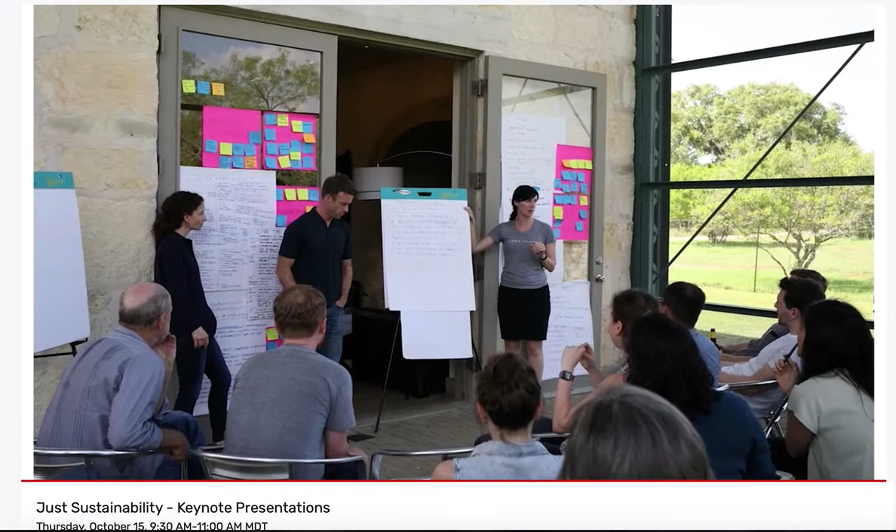In addition to the design principles that David described that drive our design process, we also think of social justice, equity, diversity, and inclusion as being an important part of environmental sustainability. Our firm has pursued the JUST label, which we think of as being a very important first step at being more transparent about our social justice at our firm.

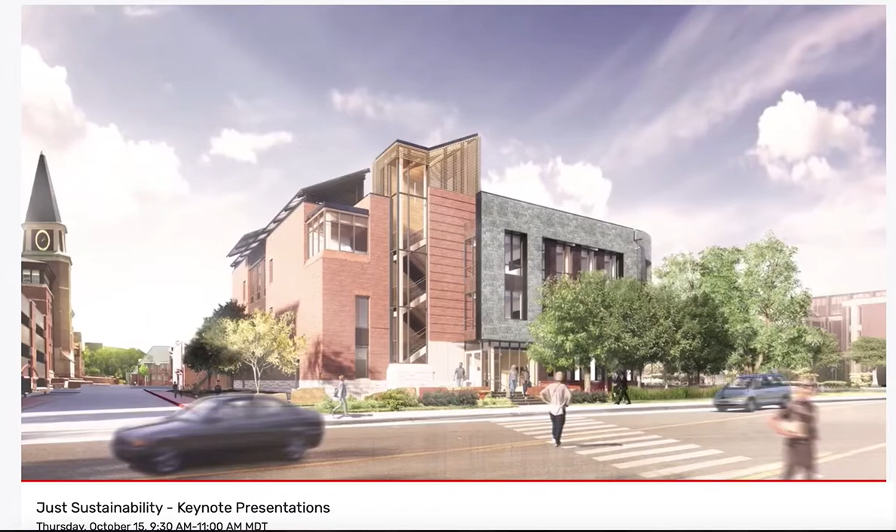We're going to talk about two projects today, the Austin Central Library and the Confluence Park. We're currently also working in Colorado, and at the very end, the dessert will be a fast track construction video of the DU project.

Over 35 years ago, Lake Flato began, and Ted Flato and I are always inspired by buildings that exhibited their particular place, fitting of their context, built from the land. In the case of these images, these are our lovely barns and silos that exhibit that great American word, ingenuity, making the most with the least.

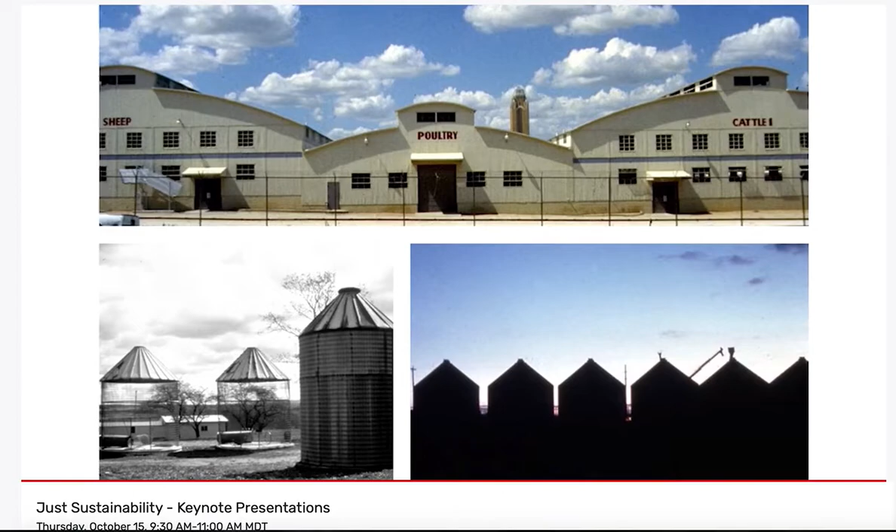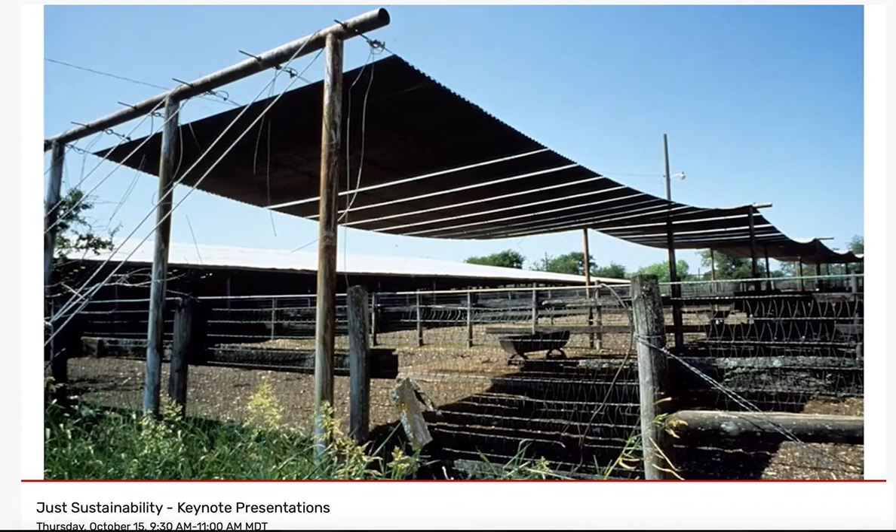I especially like these cow shades, and they led us to a journey of creating architecture, in the case of the Carraro house, of recycling an old cement plant into a home in the landscape that has a large screen porch and is very much connected to the environment.

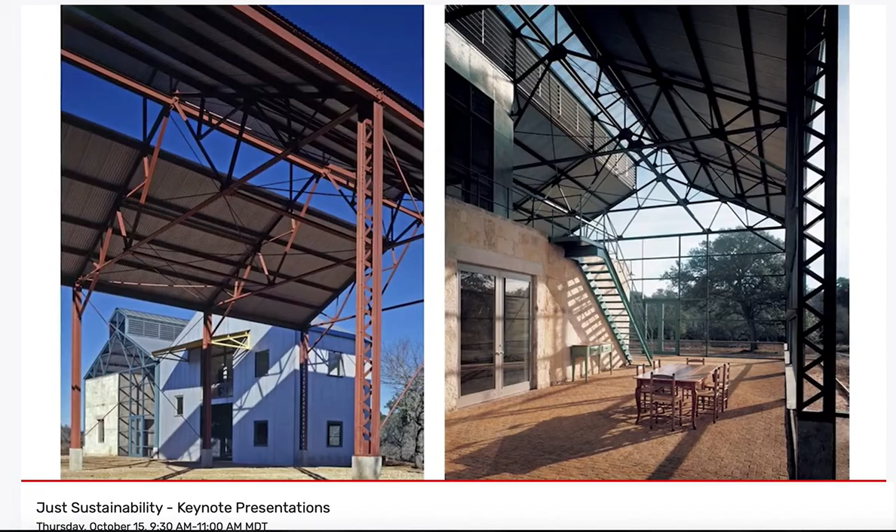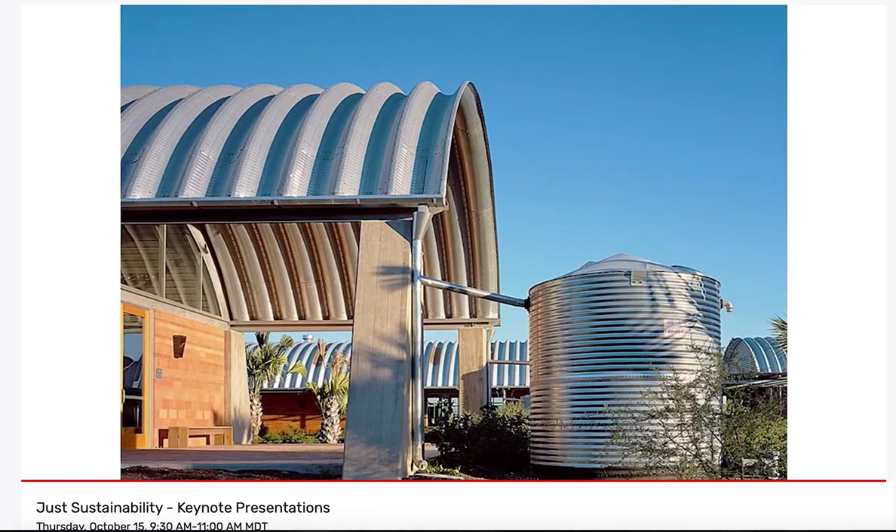The screen porch is actually the best room and the largest room of that house, which then led us to other forays into the wild, such as the World Birding Center near the Rio Grande Valley, which recalls the silos of Texas with corrugated metal roofing that is both sheltering and prefabricated, and even recalls barns. Our mentor, O'Neil Ford, said that he never met a barn that he didn't like, and that's certainly true with us as well.

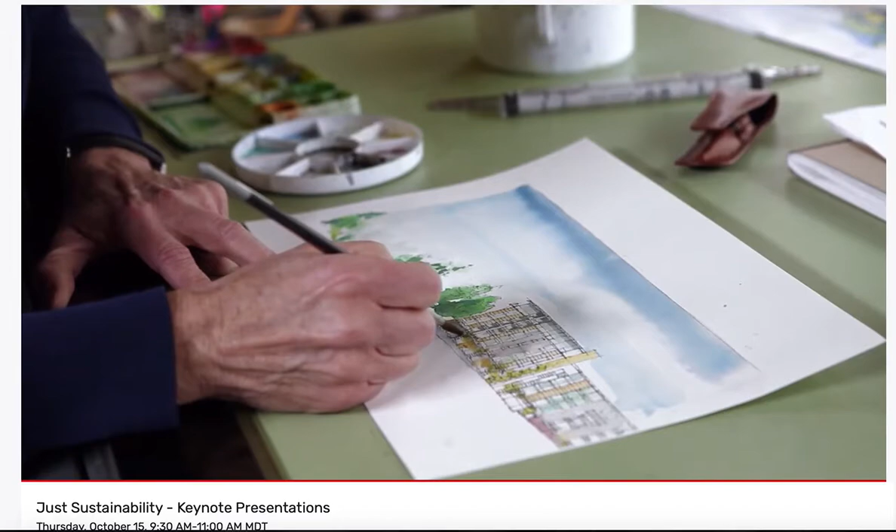We are really excited about what we do and how we do it. We have an office of 120, an office in Austin, an office in San Antonio.

Every year we go out to West Texas, to the West Fork of the Upper Nueces, on a retreat. It's called Flake Lato because we used to get mail addressed to Flake Lato, and it became such a joke that we call that our retreat. We enjoy building together itinerant shade structures that will protect us from the sun, and we grill and joke and swim and enjoy one another. Building buildings, crafting buildings, designing buildings is such a rigorous journey that it's so important for us all to enjoy one another and our clients and the occupants of our buildings, and to watch the buildings emerge.

So I grew up in Austin. It was really important for the library that it be really exuberant and capture the spirit of Austin, keep Austin weird. What that really means is being outdoors and enjoying the outdoors.

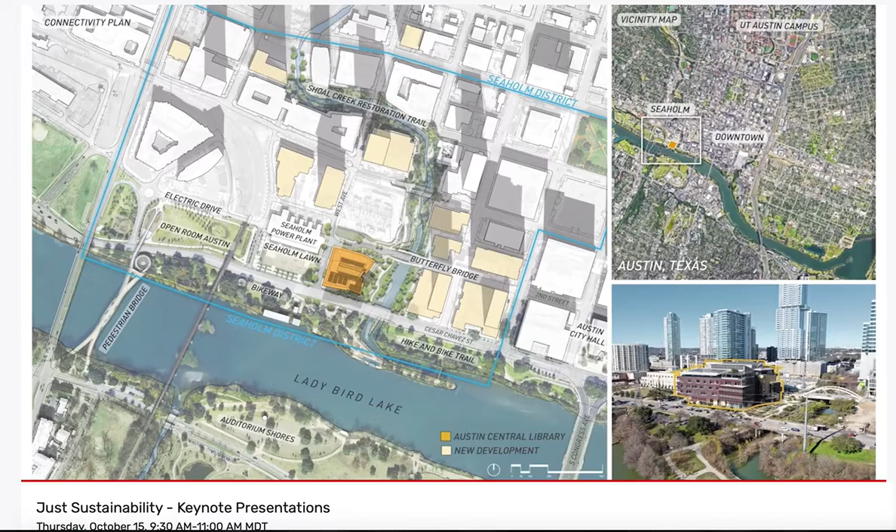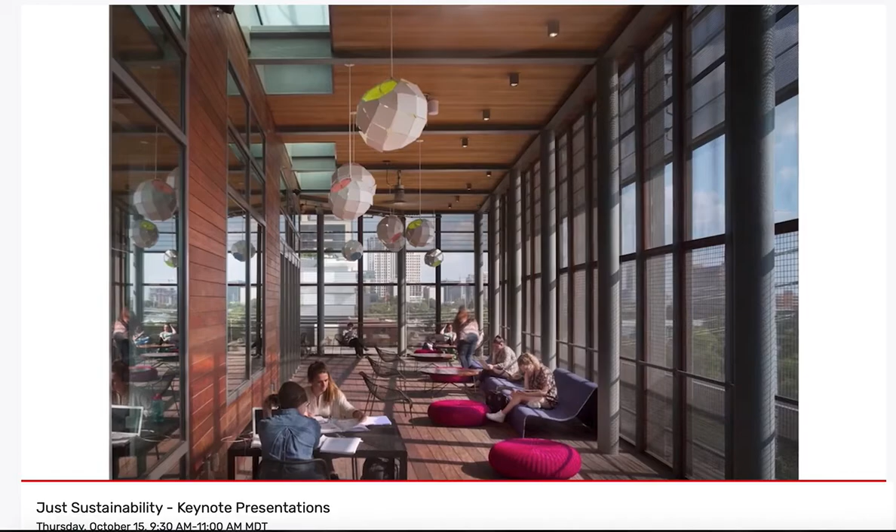Citizens in Austin never had a destination where they could go to see the river and Lady Bird Lake and the confluence of streams and creeks into the Colorado River. So finally, the library was an opportunity to create screen porches, and in this case, a rooftop garden that doubles as an event space, a butterfly garden.

The Austin Central Library Integrated Design Workshop was a really important milestone in our design process. We brought together a group of not just the design and construction team, but all project stakeholders, including the owner, the users, and neighborhood residents, to come together and really set a vision for what we wanted the Austin Central Library to be. Sustainability was a very big part of that vision.

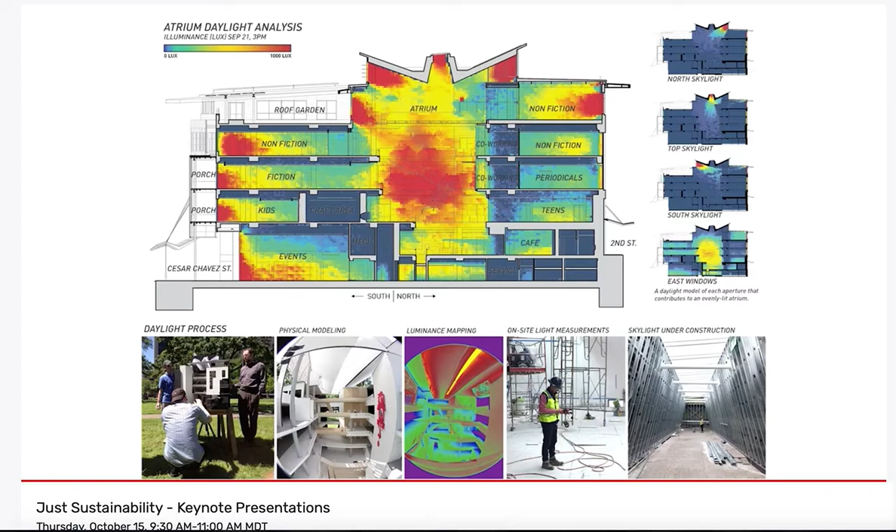We set a very ambitious goal for the library to be the best daylit library in North America. We also felt that as a civic project, it was our responsibility for the building to serve as a model of stewardship and conservation for what responsible water use looks like. The library is shaped by light.

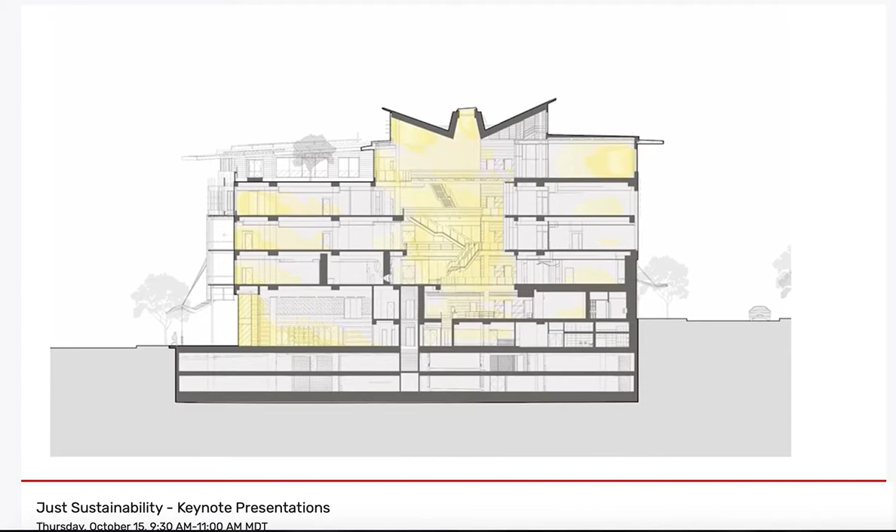We wanted the library to be the best daylit library in the United States. In order to achieve that, we had to think about how light comes into the building, is reflected, and dispersed throughout. This section shows how the lantern becomes both a reflector and a means of beaming light down 5 stories within the building.

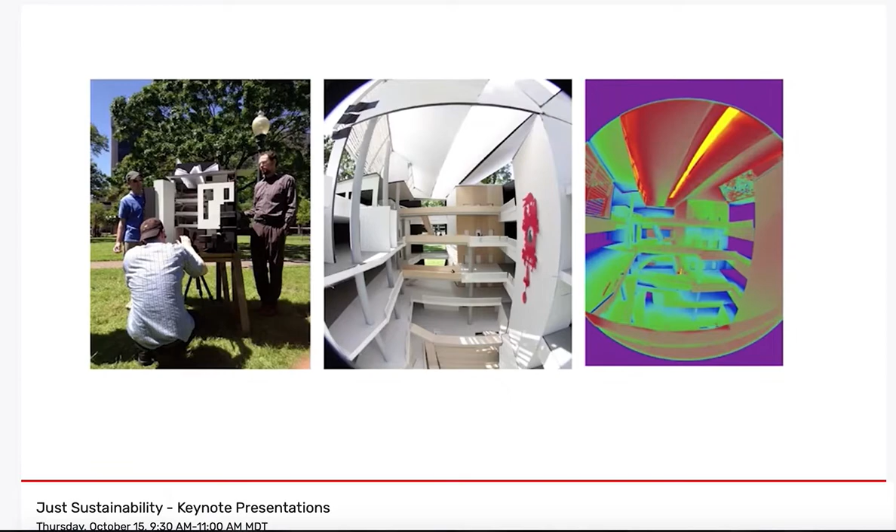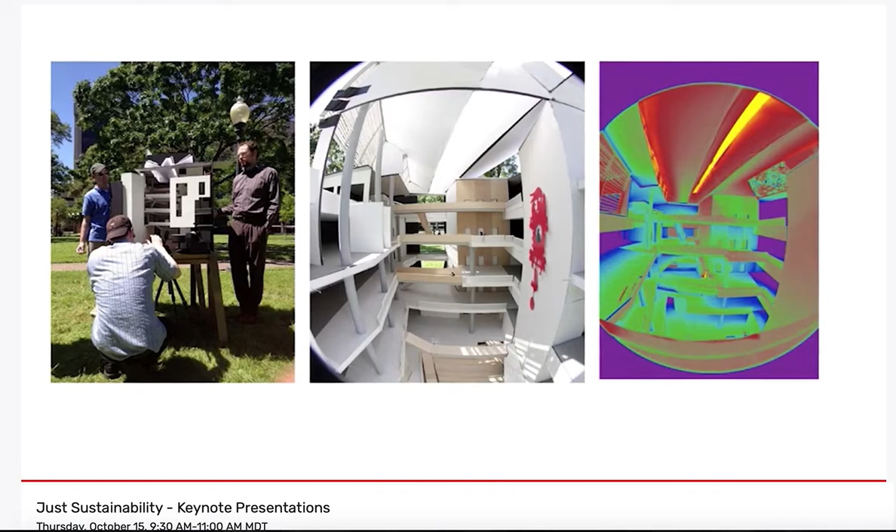We created daylighting models, out in the park, playing with a big quarter-inch scale model to adjust the best shape of the aperture of the roof and how that light beams into the space. We used computer modeling and luminance modeling and worked with Integrated Design Labs in Seattle to tweak our sections.

This is the image that shows the aperture, the 8-foot wide frosted skylight that is beaming light straight down 5 stories, and then the clerestory, which is bouncing light into the upper areas of the building, ensuring 80 to 85% of the building area is daylit.

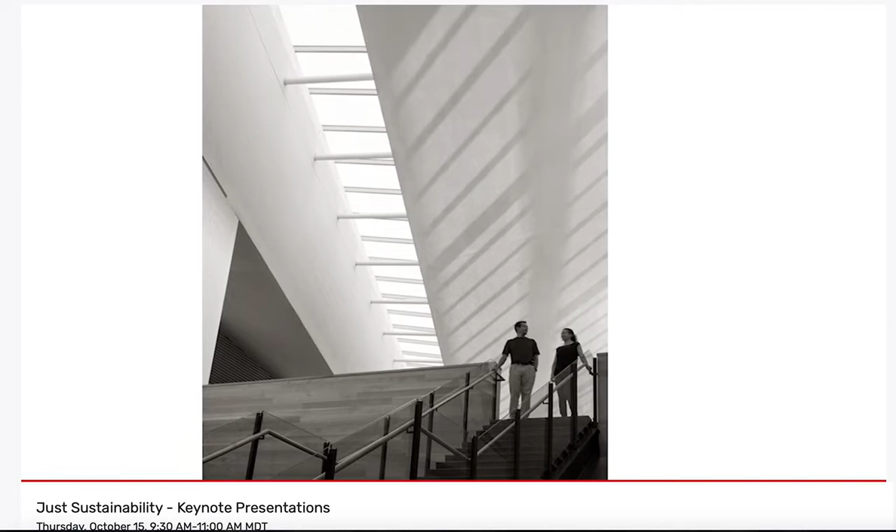A look up from the bridges to the skylight aperture shows the nature of how light is beaming, bouncing, reflecting, and refracting throughout a 5-story space. So it really does become Austin's living room.

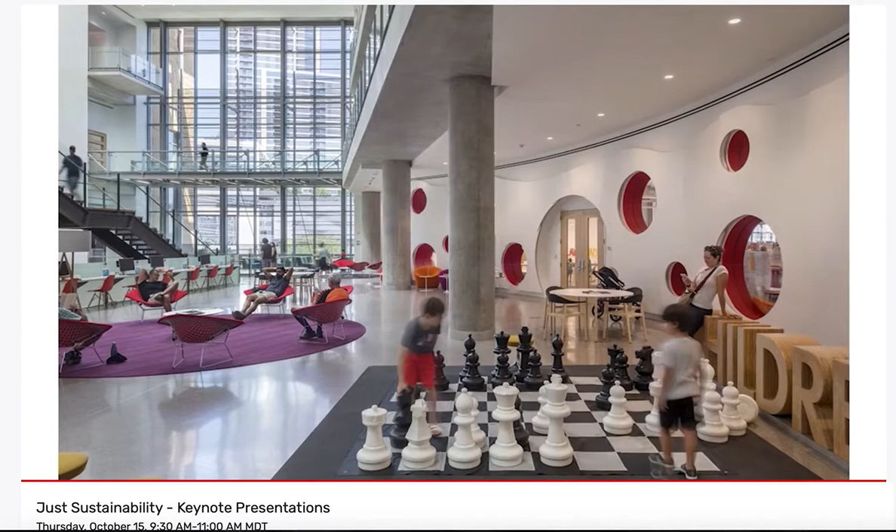For the library to become a library of the future, it was really important that every floor level felt like it had its own living room, its own purpose, its own connection to the outdoors. On level 3, kids can play chess, go into the children's area through round apertures and have reading moments, while teens can be on their own and away from the family, doing whatever in the world teens do in their own space.

Looking out to Shoal Creek to the west, certain parts of the building are very much a stone civic building—weathering, purposeful, permanent—a sense of a real civic presence, not just a repository for books, but the passing and sharing of knowledge.

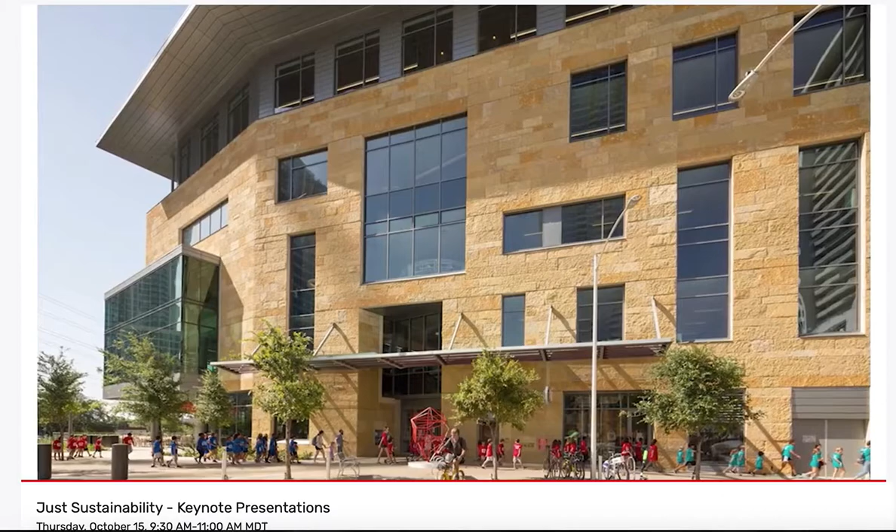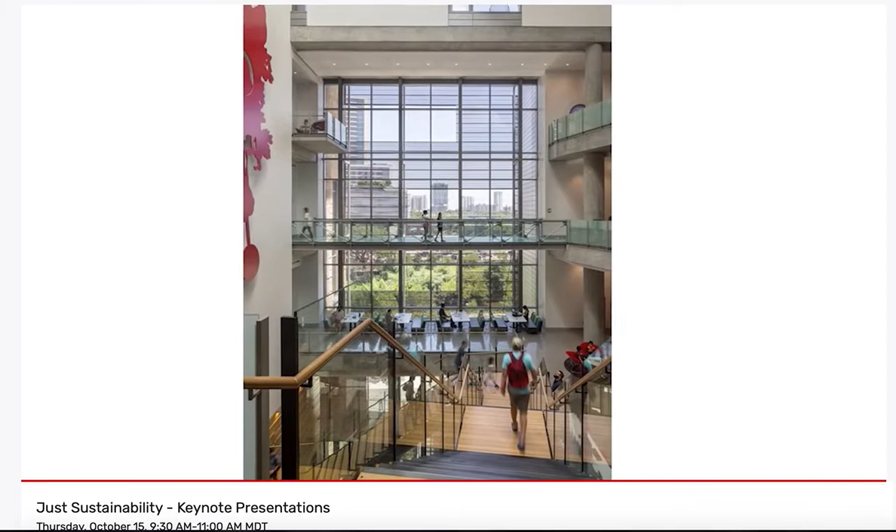Within the building, there are always means of looking out through large openings to Shoal Creek and Lady Bird Lake, with glass bridges, wooden bridges, a real array of means of moving through the great 5-story living room space.

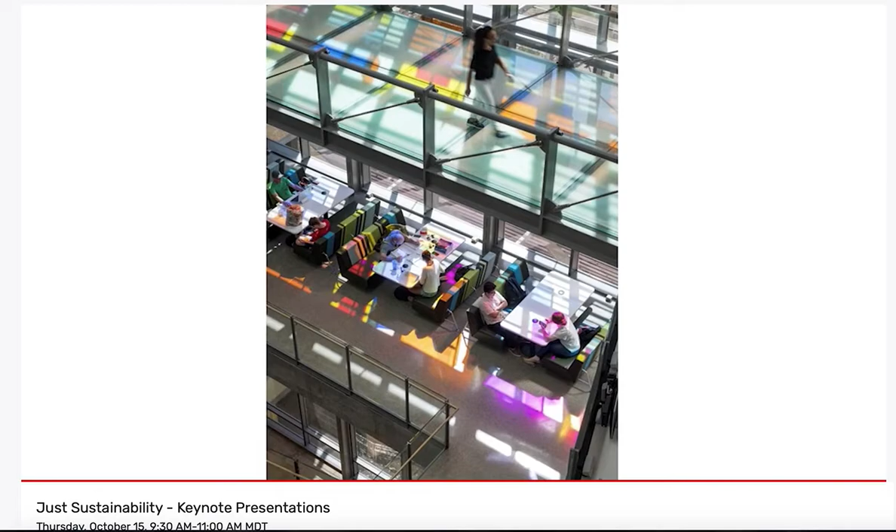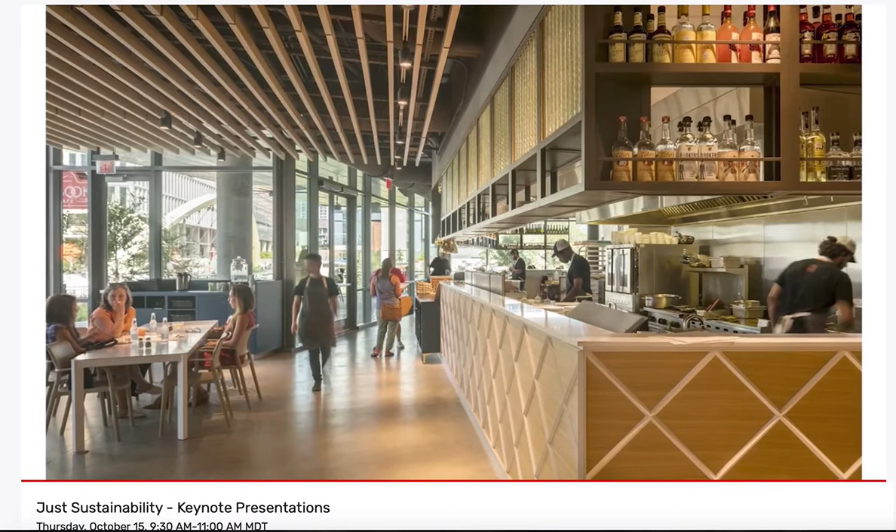At the street level, there is a store, a restaurant, a great event space. We purposefully put program at the street level that would animate the streetscape and make the city and cityscape better and more active. The event space holds 650.

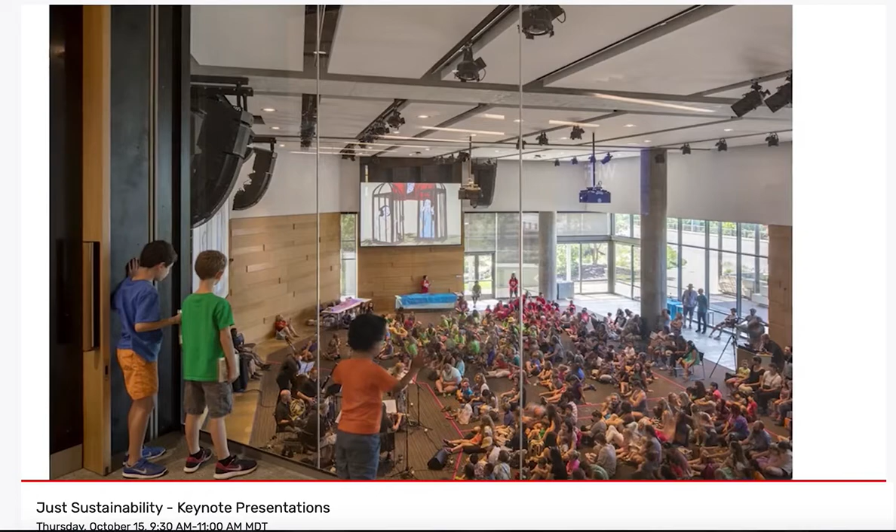They have many events, whether it's for AIA awards or all kinds of nonprofit groups, always coming and going. There's this ebbing and flowing of people using the library, not only to share knowledge and meet and make community, but also even to do startups in some of the shared conferencing spaces throughout the library.

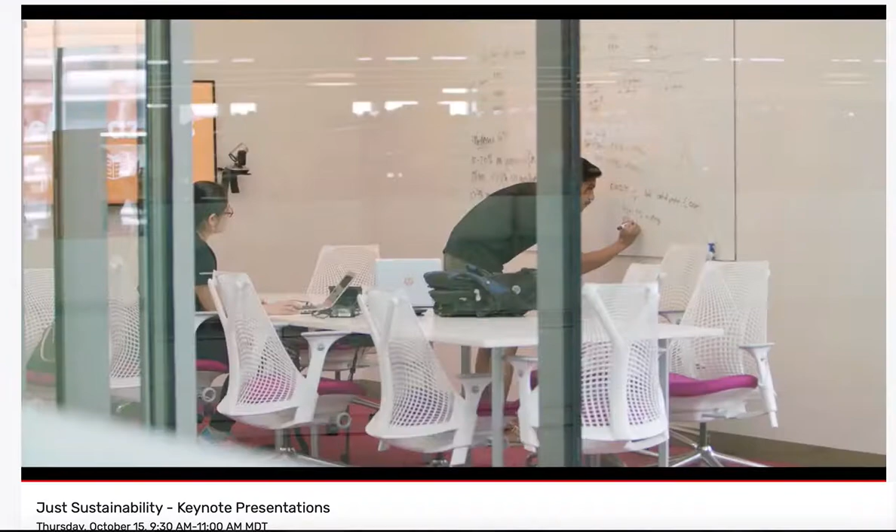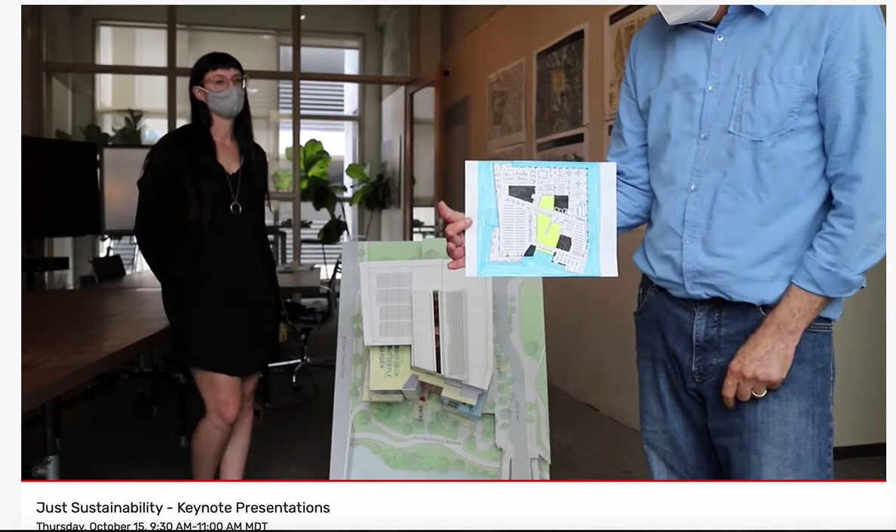As we evolve, the yellow indicates the east-west core of the atrium, beaming light in. This is the internally lit zone, and the perimeter lit zone. That's how we got to 85% daylight.

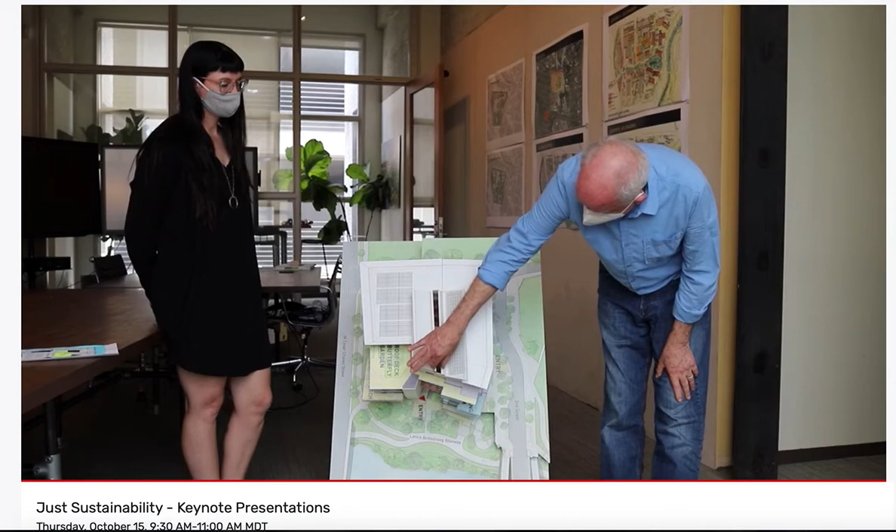So we made many models. This is one, and this is a view from Shoal Creek, running east-west. This is the top-lit skylight—it beams a white skylight down 5 stories into the building.

From the south, where Heather is, light comes and bounces off this roof, off this ceiling, and down in, bouncing back into levels 5 and 6. From the north, this clerestory brings light and beams it in on the south end of the east-west bar.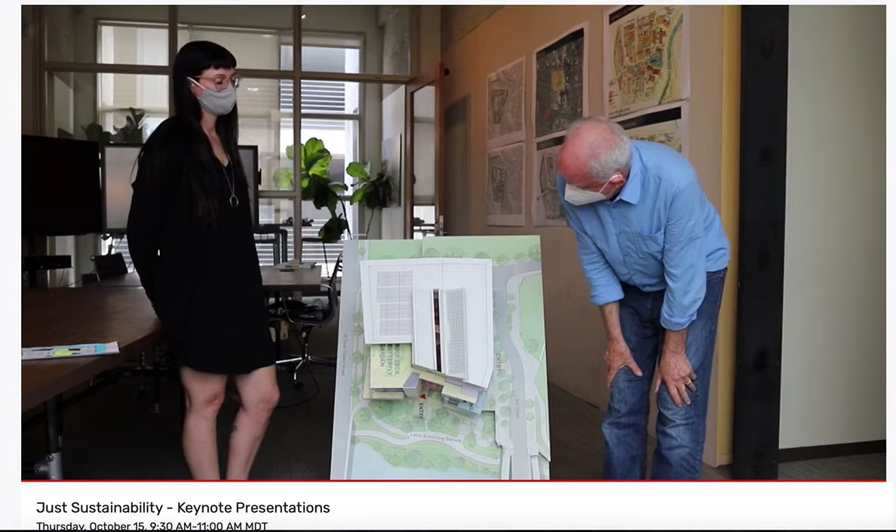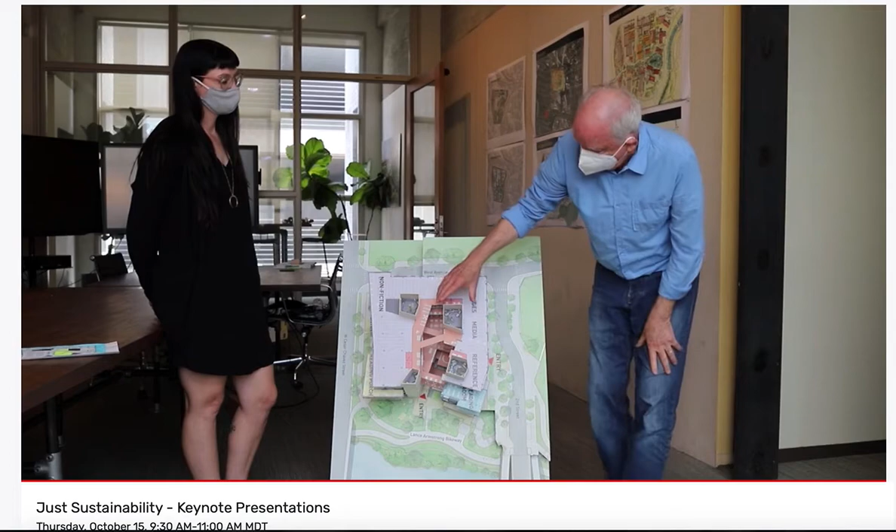So as we built lots of models, this one shows how the core—those 4 big opaque pylons, elevators, stairs, restroom, mechanical—are in these 4 quadrants, allowing the atrium to run east-west with views out to the east and downtown. The western view is less desirable, hot. South views to the lake offer really great daylighting, north daylighting.

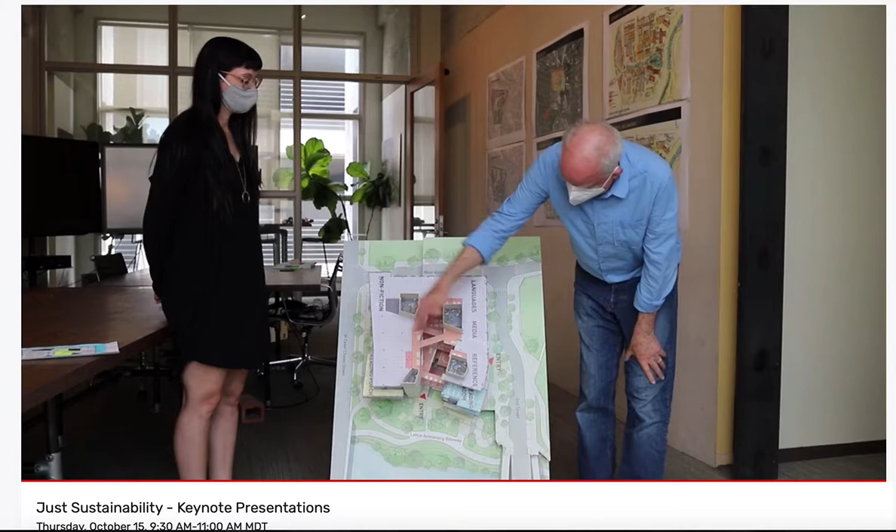This was a really nice way of thinking about and showing the library how this atrium was different as you moved up floor to floor. This bottom level, and level 2 effectively, is the great arrival, where you come as a family and kids go to the kids area and teens split off. And you move up and there's a reading room that's double height. So all variety of spaces throughout the building.

From every approach, this building looks completely different because it is tuned to its unique daylighting and sun angle needs. As David said, the west facade's views aren't quite as desirable there and the heat gain is very serious, so we tuned our shading strategy accordingly.

We've got a much denser shading there so that we can make sure we're blocking the glare that can provide visual discomfort, and that we're knocking down the heat gain, which would have increased our energy needs.

So wasn't this 26% glazed by area? Correct. And the north was 38, 39%, south was about 35%, and the east was similarly around 34, 35%.

So every facade is tuned to peripheral daylighting. We're maximizing daylight, minimizing heat gain on the exterior skin, and beaming light down through this atrium to provide fill-in light in the internal core, while at the same time giving them a 100-year building.

These are all flat floors, so they can program these floors as they want. The only things that can't move are the opaque cores—every other space, every wall is movable. So in terms of a 100-year building, it's eminently flexible.

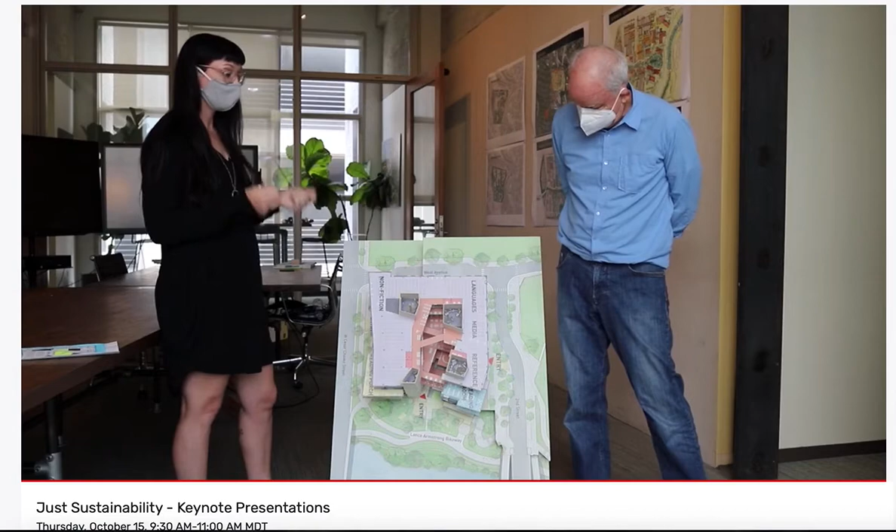You'll notice even the placement of the staircases and walkways throughout the project were carefully placed so we could make sure we weren't creating any dark spots throughout the library. So we used a variety of tools—a physical model was one of them. We were also using computer simulation tools, constantly testing the impacts of different design decisions and making sure we were providing really great daylit spaces.

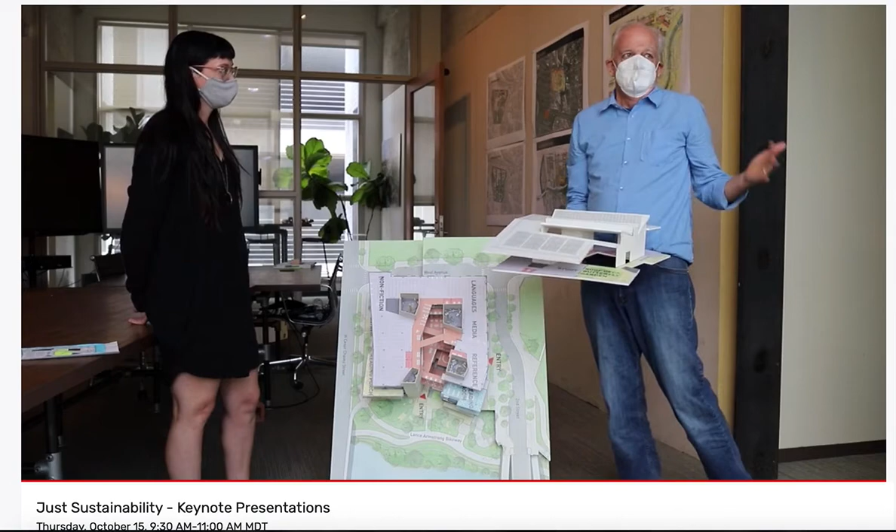Here's this crazy cool section of a butterfly roof facing south, north, along this long axis, and the openness as you move through the building. The shaping of this and the shaping of every floor plate was all modeled physically, as well as by computer. And we challenged the daylighting consultant many times, and he challenged us back. So it was a wonderful collaboration.

We also included a large PV array on the Austin Central Library. It's a 180 kilowatt photovoltaic array that tops a pollinator garden. It's one of my favorite spaces at the library because it's just a really great habitable space, very comfortable throughout the year, a great outdoor space with ample daylighting and a really thermally comfortable environment.

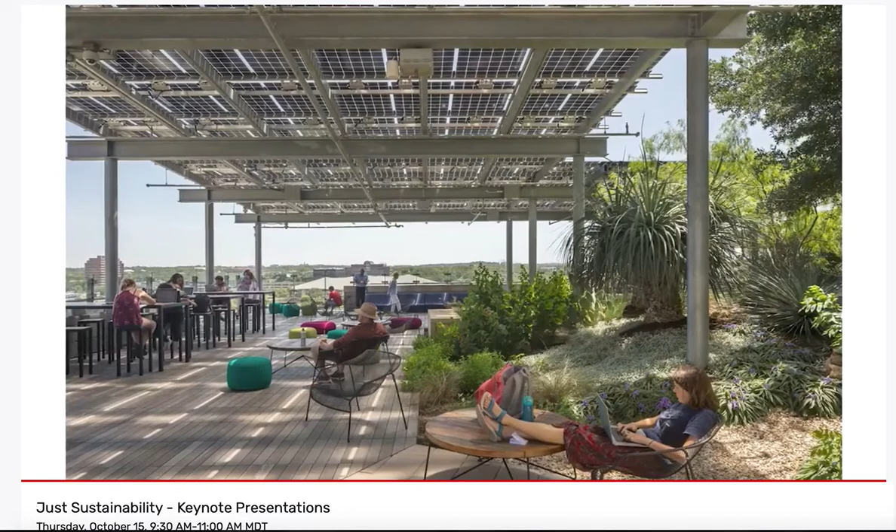That large array is actually on the downtown network, and we had to partner with the central utility to come up with an interconnection agreement, because before the library, you could not connect to the downtown grid. So this was a really important pilot project on how we can allow larger PV arrays to be interconnected on the downtown network in Central Austin.

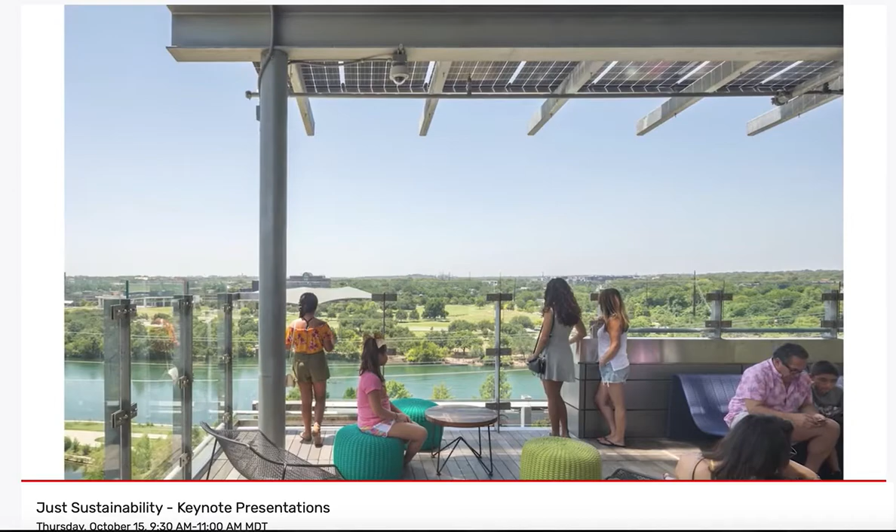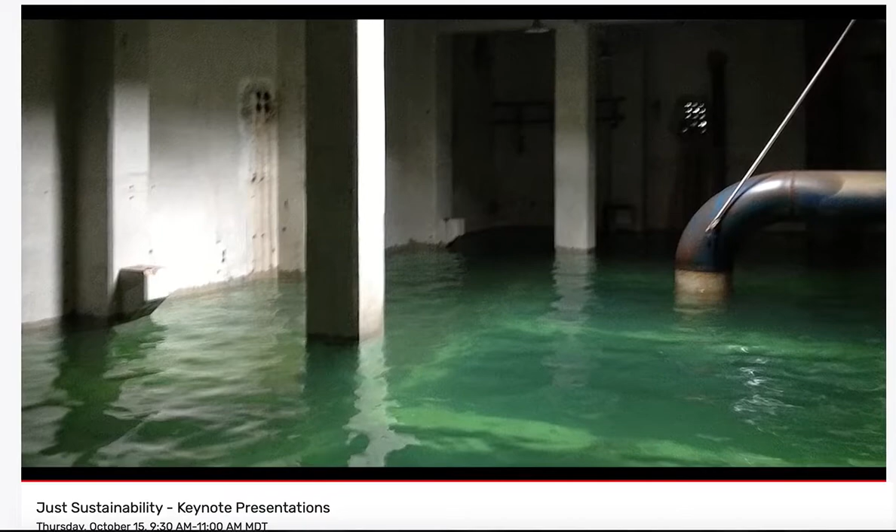After setting our water goal for the library, we stumbled upon a really unique opportunity to realize it. During that same integrated design workshop, we were walking the library site and discovered an underground vault, 373,000 gallons of volume, where we are storing air conditioning condensate and rainwater to supply most of the non-potable water needs for the project.

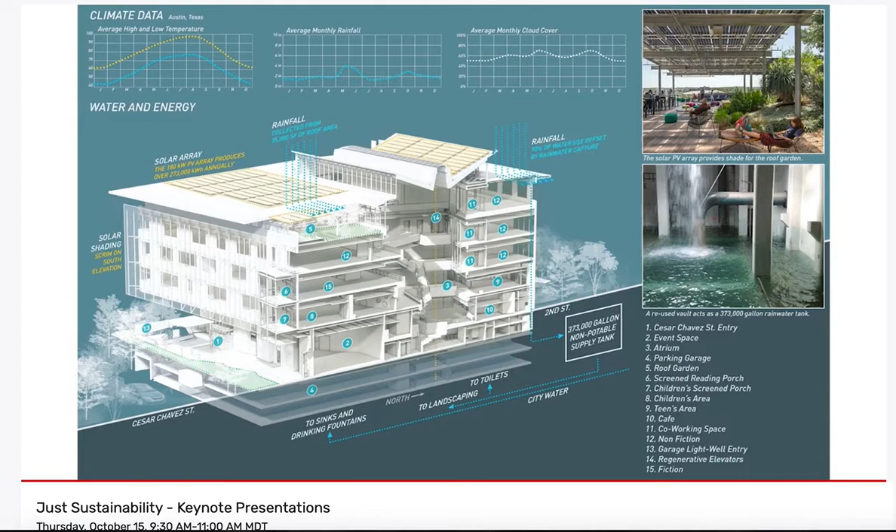The only potable water that we have in the project is for showering and drinking. Flushing toilets, irrigation, everything else is supplied by the water stored in that vault. So it's a pretty amazing opportunity for us to demonstrate water conservation in a region that is dealing with some pretty serious water shortage issues right now.

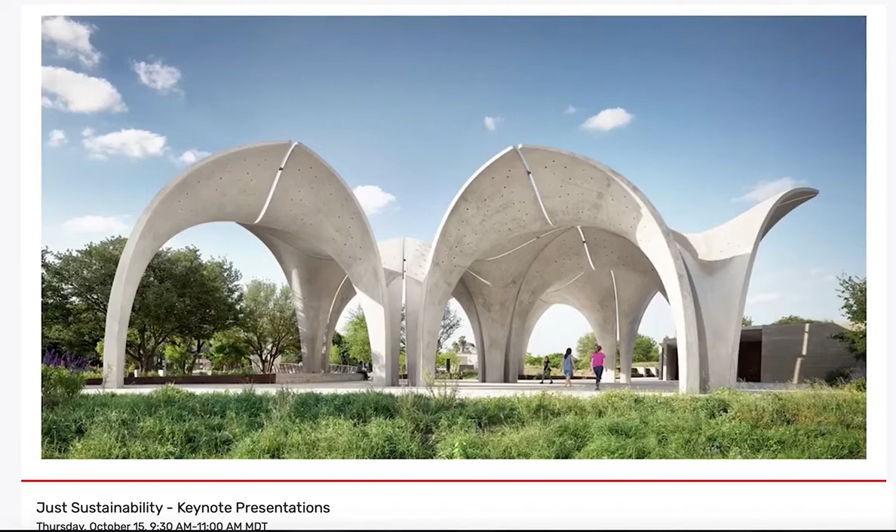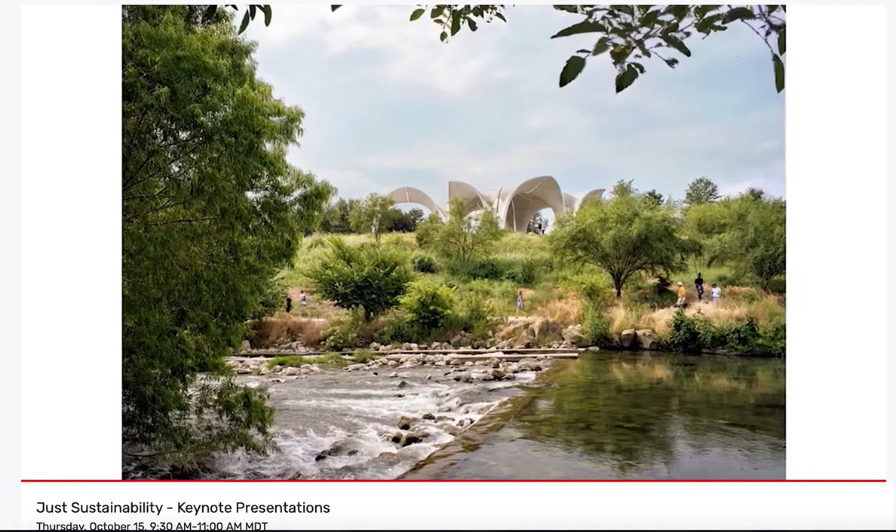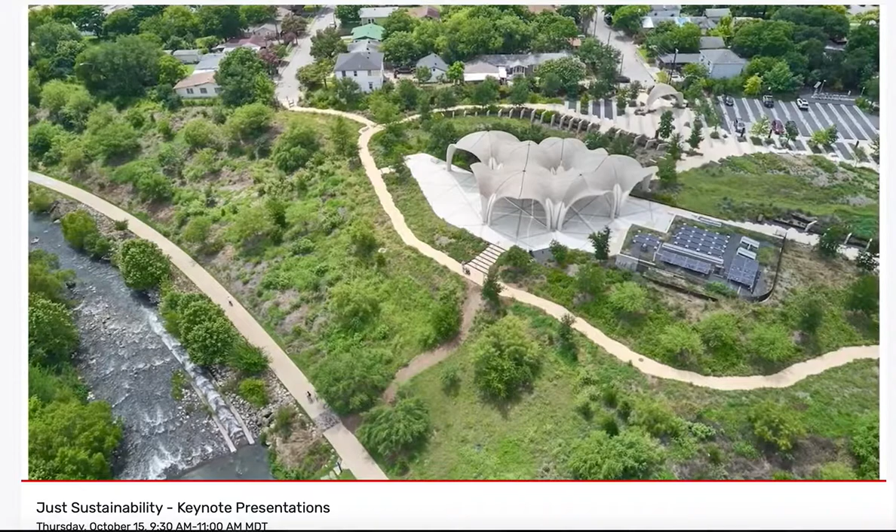Unlike the library, this is a shade structure we were asked to design to be at the confluence of the San Pedro Creek where it meets the San Antonio River, about 4 or 5 miles south of downtown, between the Alamo and the 4 downriver missions. Confluence Park was very much shaped by capturing and harvesting rainwater, and how best to funnel rainwater into a cistern, recalling how the aquifer in San Antonio and Central Texas gathers rainwater, stores it, and replenishes the ecology of Central Texas through the karst aquifer.

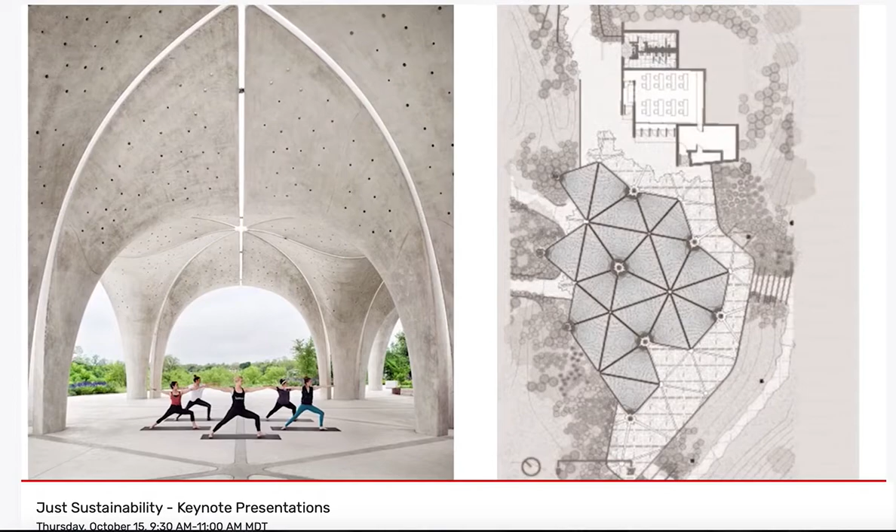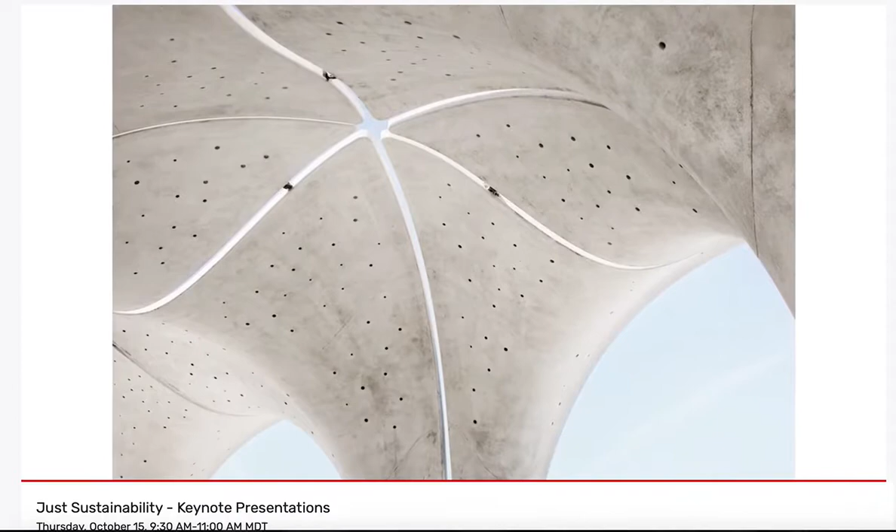It was a really fun and unique opportunity for us to collaborate with an artist and another architect, one and the same, and come up with an idea of how to craft memorable shade structures that exhibit not only how to shade one another, but also how to capture rainwater and strengthen the ecology at this confluence. We partnered with Andrew Kudless of Matsys to design the petals at Confluence Park.

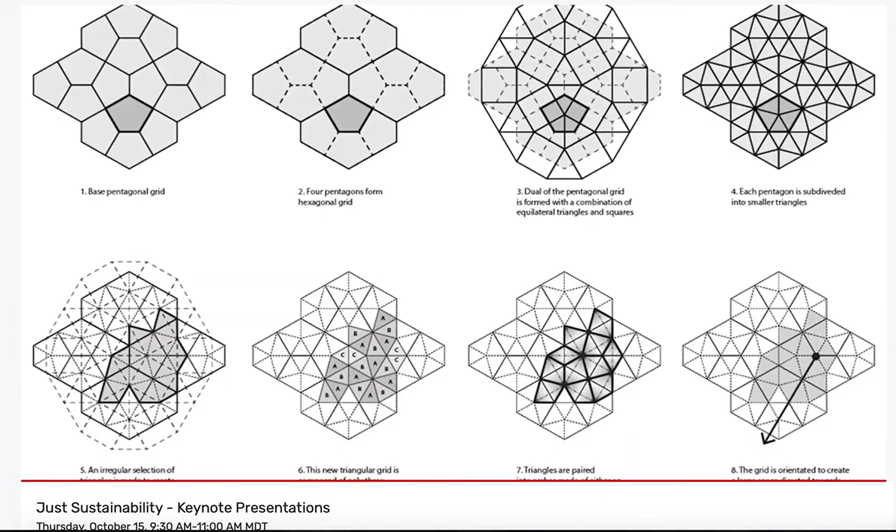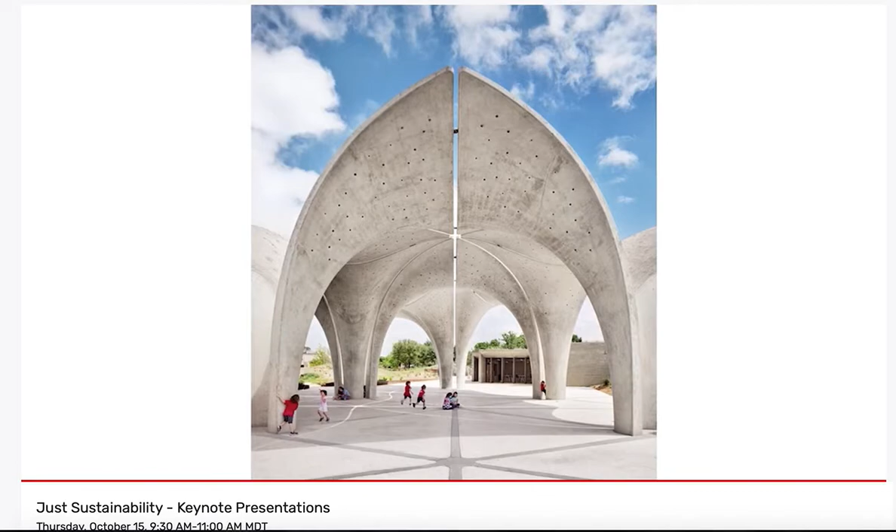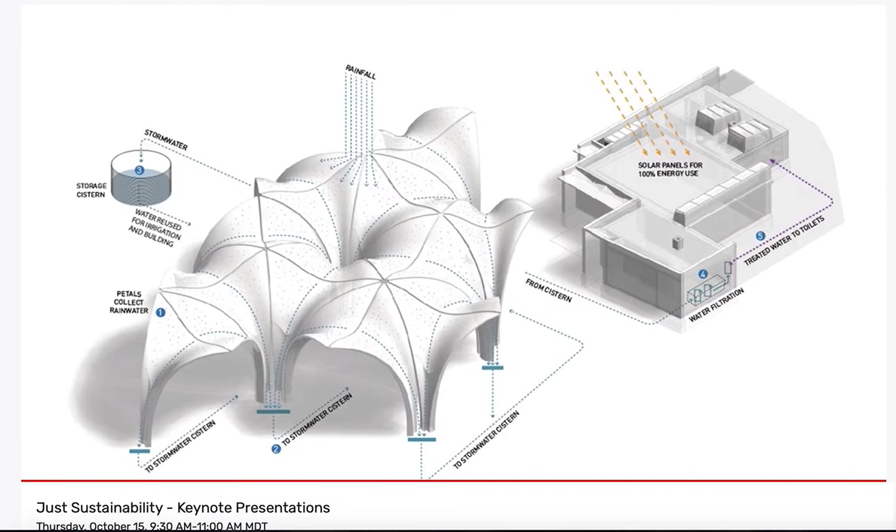These concrete petals actually take a cue from biomimicry, the design process of looking to nature to find design solutions that mimic natural conditions. We studied the natural hydrology of the existing site, how water moved through it pre-development, and how we could mimic that through the concrete petals. The petals serve as a means of collecting and storing water so it can slowly leave the site, be filtered and cleaned, so that once it enters the San Antonio River, it provides a high water quality source to San Antonians.

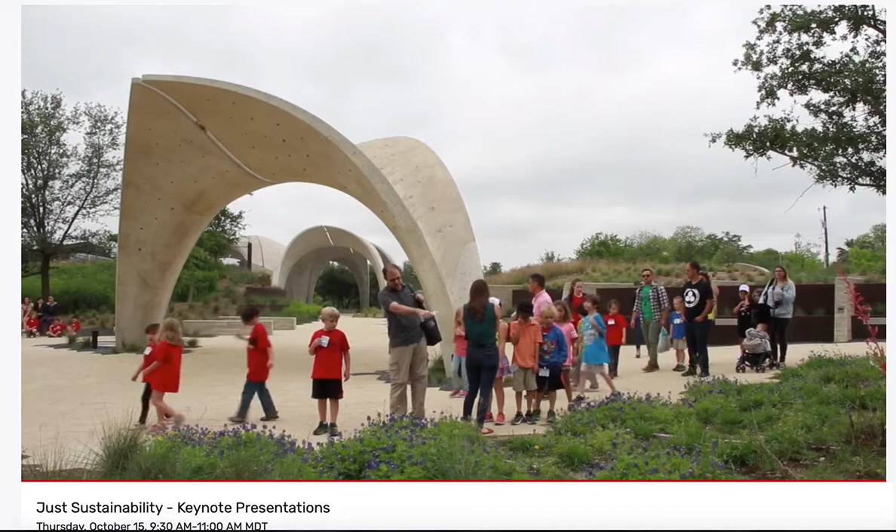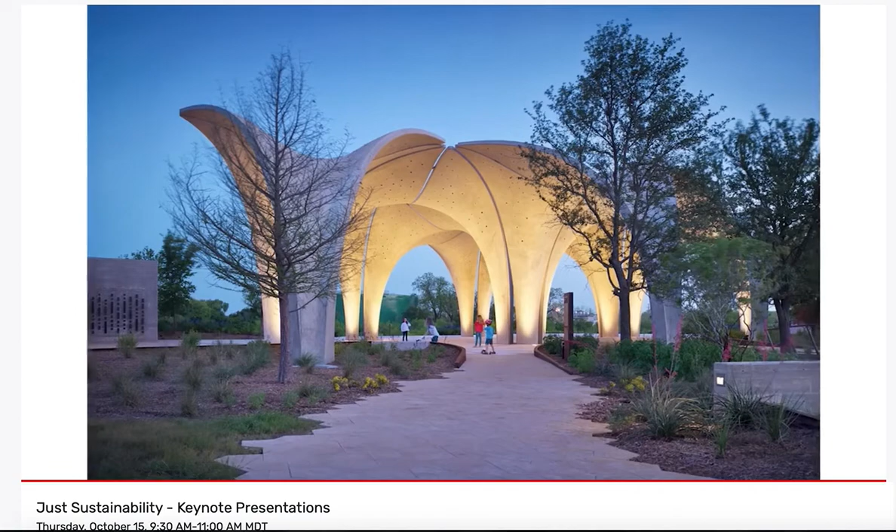One of the most important goals we set for the Confluence Park project was to make sure sustainability was demonstrable, and the petals are extroverted for that exact reason. We wanted the systems for collecting water, storing water, and producing renewable energy to all be expressed in the project. People actually come to Confluence Park whenever there's a rain event—it's a spectacle to watch water being filtered and collected on the concrete petals, really achieving that goal of making sure people understand the role of water conservation in our community.

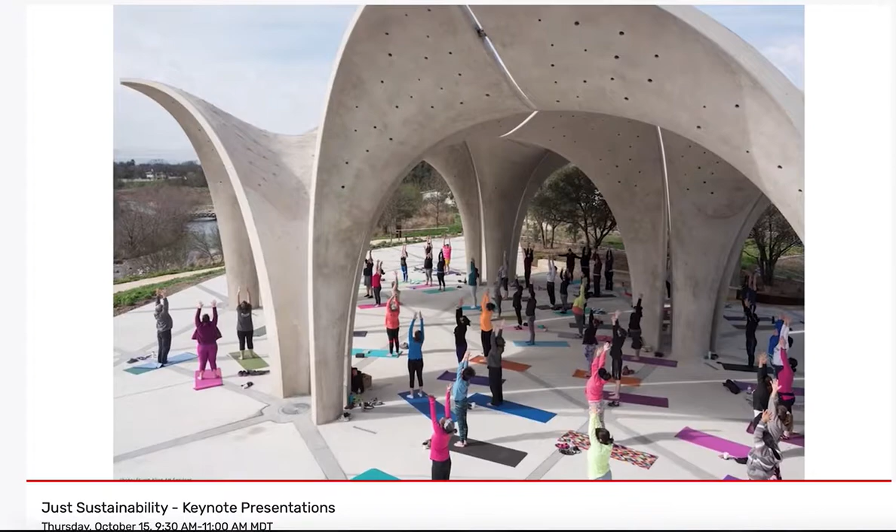Confluence Park is a very beloved amenity in its community. It's become not just a place where people come to learn about conservation in San Antonio, but it also hosts a variety of events—weddings, birthday parties. It's really become a shared space for people to make healthy living an integrated part of all aspects of their lives.

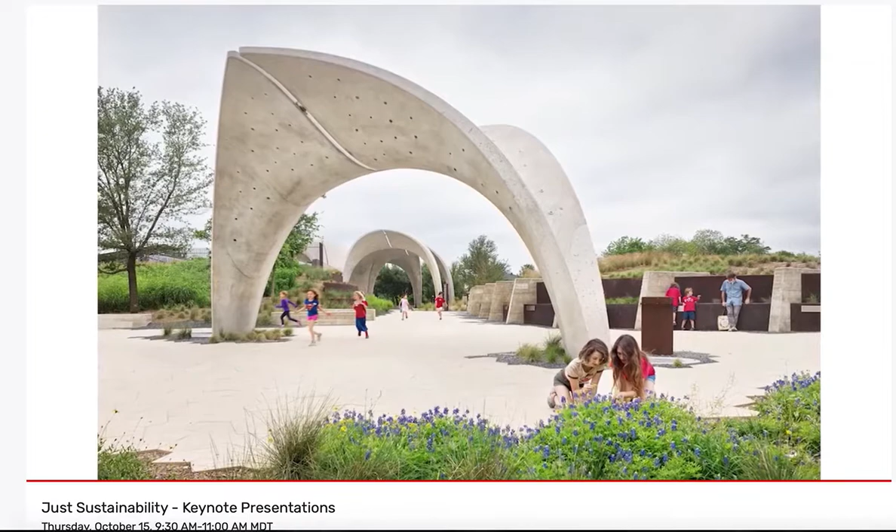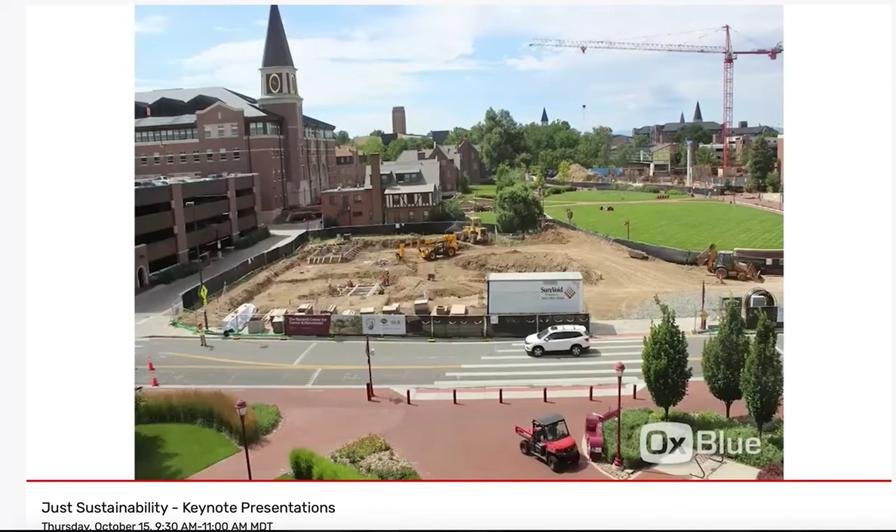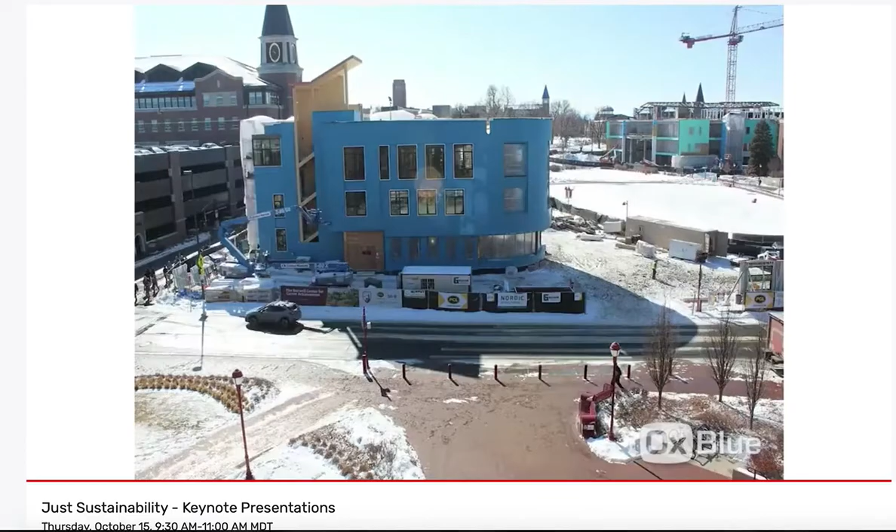In addition to the projects we're doing in Texas, we're working in your region right now as well. The University of Denver has a new Burwell Center for Career Achievement on campus that is completing construction. It's being built out of mass timber as its structure, so in addition to the carbon impacts we're always considering with energy and water savings, mass timber is an opportunity for us to reduce the carbon impacts of the building structure. The project also had very ambitious goals set through its integrated design process and is tracking LEED Platinum, so we'll be very excited to complete that project soon.

Is anyone else feeling inspired to save the planet after those presentations? Well, let's keep the conversation going.